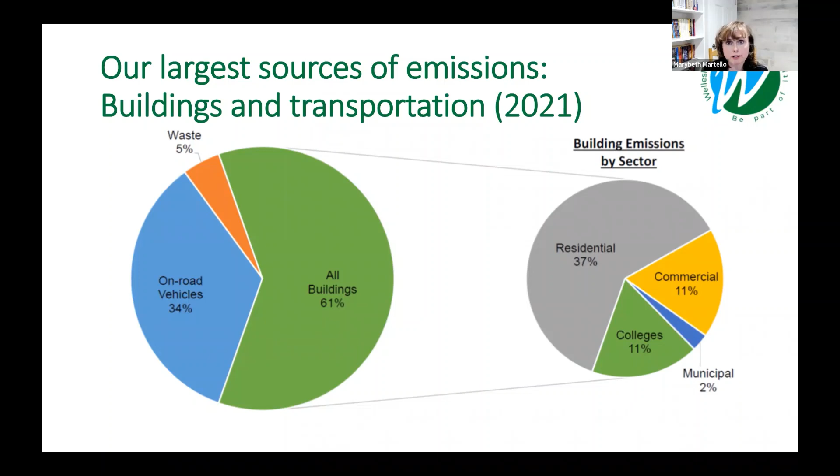And this is a snapshot of our carbon footprint townwide in 2021. And you can see that buildings contribute about 60% of emissions. And if you look inside that contribution from buildings, you can see that the residential sector is contributing about 37% of that. It's 37% of that 61. And then we have about even emissions contributing from the colleges and commercial sector and about 2% from the municipal buildings.

This slide shows metric tons of carbon dioxide equivalent according to energy source. And you can see that in our buildings, which are represented by the 3 bars on the left of the graph, natural gas is the biggest driver of emissions, followed by fuel oil and electricity. We need to get all of these bars to zero or to net zero. And electricity is moving in that direction already because we are increasingly bringing on renewable sources like solar, hydro, and wind to power the grid. Natural gas and fuel oil, however, will only reduce as we use less of them.

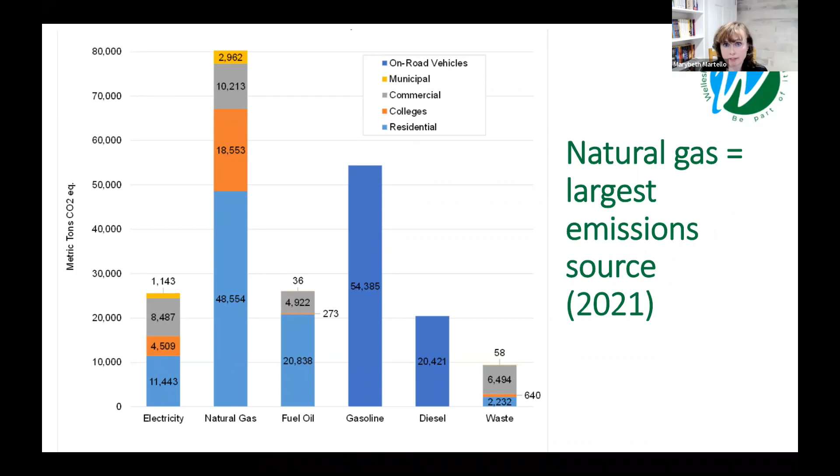So steps to net zero buildings by 2050 involve minimizing our energy use, maximizing energy efficiency, electrifying our mechanical systems and our appliances, and then powering with renewables. These steps underlie Wellesley's Climate Action Plan section on buildings. They underlie our state plans for buildings, and they are inherent, as you will see, in the opt-in code.

Next slide. So now moving to some details about the energy code. I'm going to start with a history of the stretch code. It was developed in 2009 and designed to be about 20 to 35% more efficient than the base code. Wellesley adopted the stretch code in 2011, and the Climate Act in 2021 moved the authority for the stretch code from the Board of Building Regulations and Standards to the Department of Energy Resources.

In 2022, the Department of Energy Resources, or the DOER, provided, I think, 2 straw proposals and allowed comments on those. Wellesley commented, I think, in both rounds, and then DOER issued the energy code update language in September, and that is when Wellesley's Climate Action Committee and Select Board came together in the fall to decide to co-sponsor that opt-in code. Next slide.

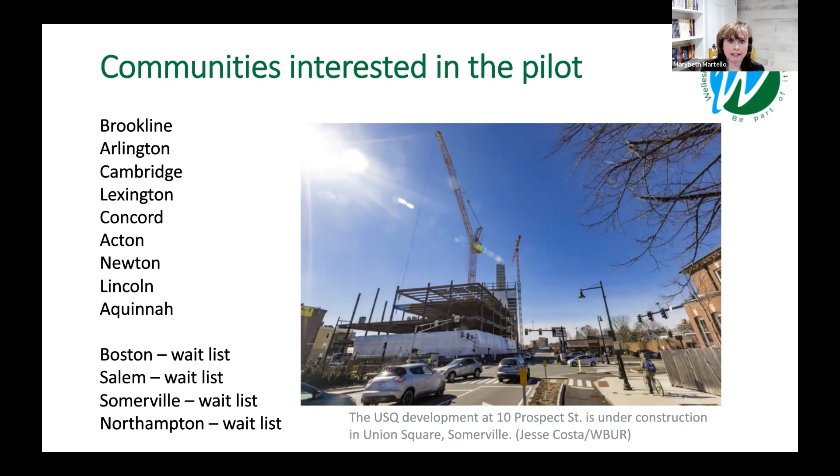So now to talk a little bit about the details of the opt-in code, I'm going to give a bird's eye view of the code, and then Ian is going to delve in more detail into the provisions. So the opt-in code applies only to new construction, not to renovations or additions. It's consistent with emissions reduction goals for the state and the town. And some of the key requirements in the opt-in have to do with electric pre-wiring, solar, passive house, and an earlier start date for the HERS 42 energy efficiency requirement. Next slide.

These are slides that Janet Mosley prepared, and she's the sustainability analyst in town. And this slide shows residential low-rise buildings. And it's comparing stretch and opt-in code for minimum energy efficiency, for electrification, and for renewable generation. So if you look along the left-hand column, you see that there's two types of dwelling units addressed in this chart: dwelling units less than 4,000 square feet, and dwelling units greater than 4,000 square feet.

The white rows reflect all electric buildings, and the light blue rows reflect mixed fuel buildings. Mixed fuel buildings are those that include some form of combustion. And you can see that the stretch and the opt-in code are the same for the all-electric scenarios. The green writing in the light blue rows reflects where the opt-in code differs from the stretch code. So let's look at dwellings up to 4,000 square feet in size.

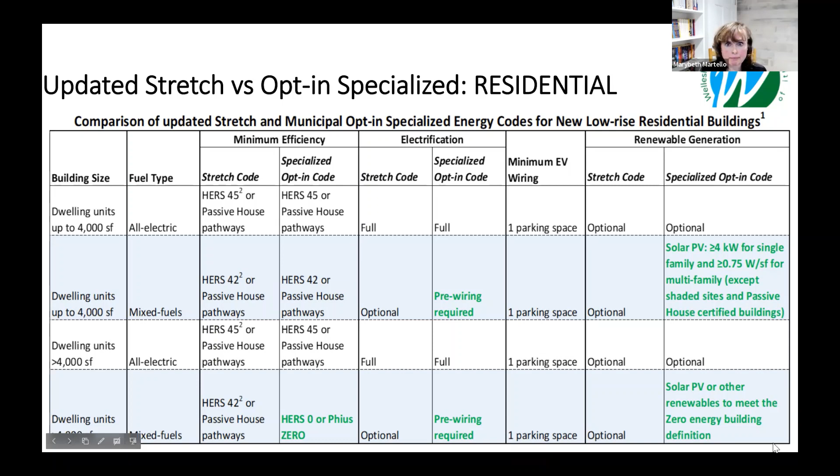So this is a picture of new low-rise residential construction in Wellesley. I want to thank Janet again for this chart. And you can see that the total height of each bar reflects the number of new low-rise residential buildings in the given year. The orange part shows dwellings greater than 4,000 square feet, and the blue is under 4,000 square feet. And you can also see that between 2018 and 2020, about 55 to 59% of these buildings were greater than 4,000 square feet, and that's conditioned space. Next slide, please.

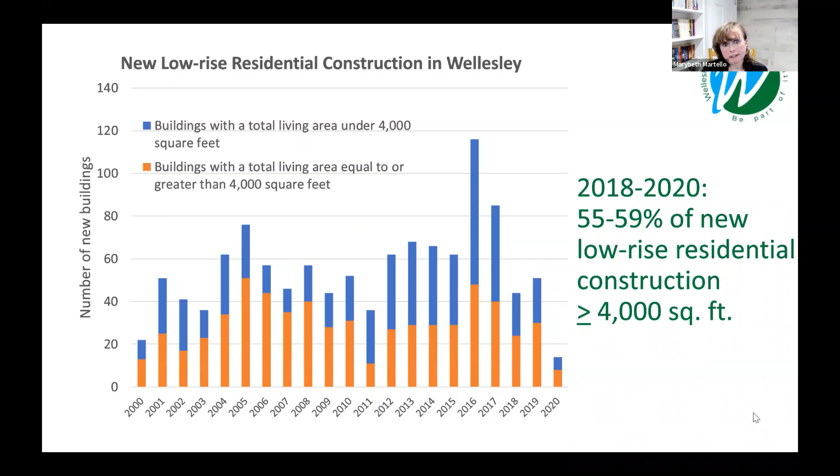We don't have a lot of time to get into incentives. The Climate Action Committee and other groups around town are working. We've been holding webinars about incentives throughout the year, and we'll continue to do so. But I just want to highlight that for the kind of provisions that are set out in the opt-in code and in the stretch code, there are an increasing number of resources to help support weatherization, electrification, energy efficiency, and solar. Also, something that we're going to be talking about as we work through our speakers tonight is that all electric homes are generally cheaper to build, and these high performance buildings are cheaper to operate. Next slide.

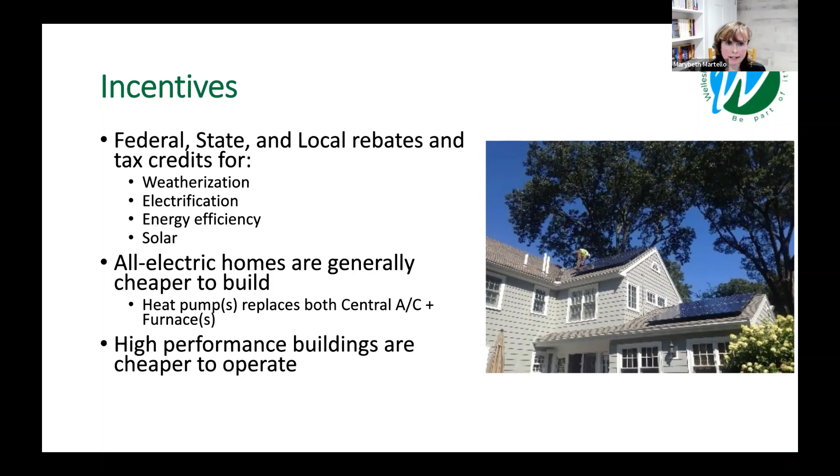So why adopt the opt-in code? We're going to learn more to support these claims as we work through other presentations tonight, but they're definitely necessary for meeting our greenhouse gas emissions goals. They help us to stop digging that fossil fuel hole. The easiest place to stop using fossil fuel is in our new construction, so much easier than retrofitting. So we need to take that low-hanging fruit. And it helps us to avoid costly future retrofits, as we'll eventually need to be all electric.

And especially when we're talking about things like passive house and all electric, encouraging those means that we're encouraging healthier, more comfortable indoor environments, and especially in the case of passive house, more resilient buildings. Next slide. And so now I'd like to turn it over to Ian. Really grateful to have Ian tonight. Thank you.

Thank you, Mary Beth, and thank you everyone for taking your time to learn about this topic. I'm Ian Finlayson with the Department of Energy Resources. And tonight I'm just going to give you a high-level overview of the specialized or opt-in specialized energy code. And then if there's questions, we can get into more detail later as folks want. So next slide, please. So I'm going to start with the residential low-rise sector, then multifamily, and then we'll get to commercial after that. So next slide.

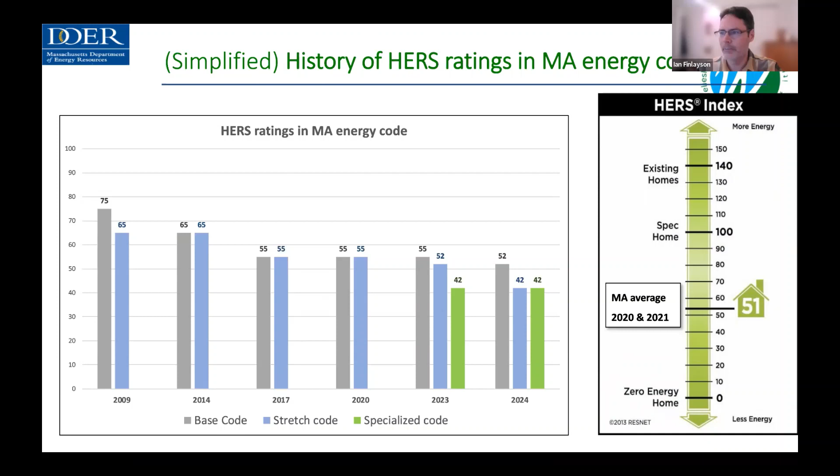So now to understand the difference between the stretch code, which Wellesley is currently on, and then the specialized code, if you choose to adopt it. I'm using that same color scheme where the specialized code is in green and the stretch code is in blue. And the point here is that the specialized code isn't actually affecting every building. And where it is adding additional requirements above and beyond the stretch code, we're trying to keep them fairly straightforward and simple, recognizing that this is going to be a conversation in 300 or so towns and cities. So there are not a lot of nuanced energy efficiency changes for you to understand, although there's plenty of detailed changes in the stretch code itself for folks that are interested.

But the main difference between the stretch code and the specialized code is that the stretch code mandate, which dates back to 2008, is about energy efficiency. And the specialized code is really about decarbonization. And that comes from the legislation that established these two codes. So the 2021 Climate Act is what led to the opt-in specialized code being created.

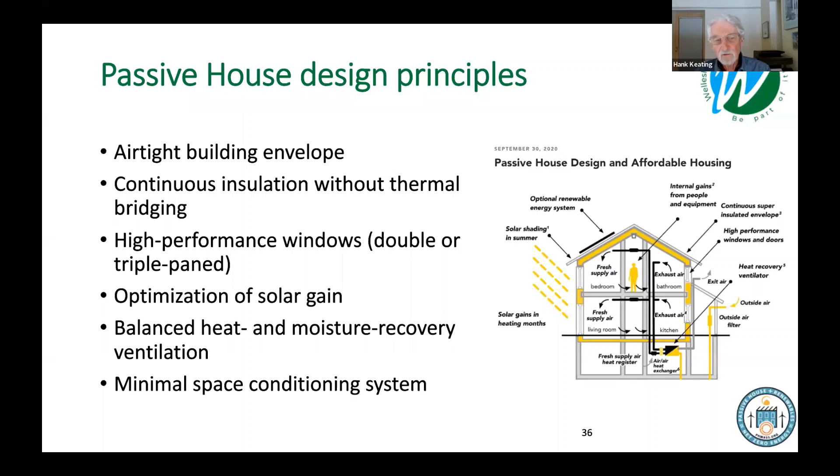So what we find out is that works perfectly well because smaller units concentrate the internal heat gains from buildings. And obviously, when you do a multifamily building, if you have an apartment, it typically has one exterior wall. That's 1 out of 6 surfaces that the unit has that's exposed to heat loss. So when you combine those things, the multifamily buildings are dominated by internal heat gains, and we do not need to worry about optimizing for solar gain. Next slide, please.

So when we do this, what are the benefits? The first benefit actually is reduced greenhouse gas emissions and reduced heating and cooling costs. Then I would go to comfort, increased comfort. When we talk about the air changes per hour, the infiltration is draftiness. And we all know in New England that we've all been in many, many houses where it's drafty.

And it's drafty and uncomfortable, and we have our favorite single glazed, double hung windows where we've got infiltration and we've got radiant cooling off the glass. All of this is what makes these buildings uncomfortable. All those problems are solved with Passive House.

In doing that, because we're introducing 24/7 heat recovery ventilation, the indoor air quality in a Passive House, even though it's sealed up very tightly, is much better than in a house that doesn't have ventilation. One of the ways I like to look at that is to say, a lot of people, builders especially, will say, well, boy, if you seal it up like that, that's going to cause problems.

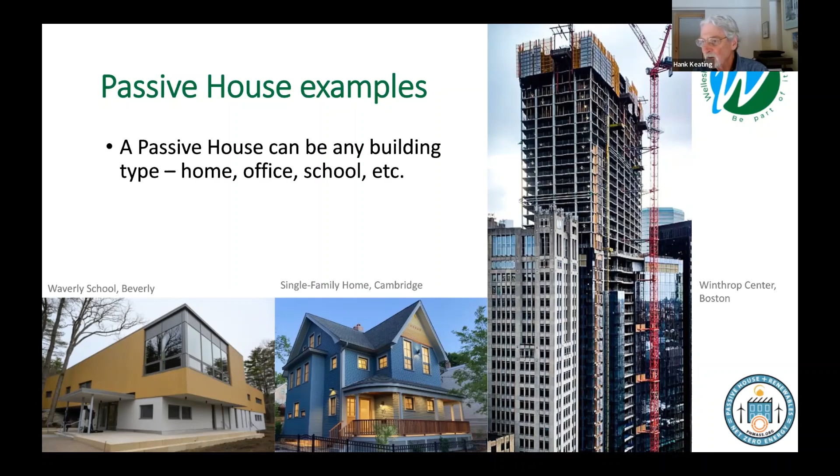This is just to make the point, because we have so many examples of Passive House housing. Passive House is for all buildings, as Ian was referring to. We've got schools, single-family homes, and the largest Passive House office building in the world right now is going up in Winthrop Square in Boston. So it covers all the building types. Next slide, please.

So this was obviously the question that we got 5 years ago when we really started introducing Passive House and hoping to get it as a requirement in codes, and we finally are getting there. The questions were, how much more does it cost? And what we did is we worked with Mass CEC to come up with the Passive House Design Challenge, which offered affordable housing developers money to enter this and convert a design they had to Passive House, and then track the cost increases very carefully.

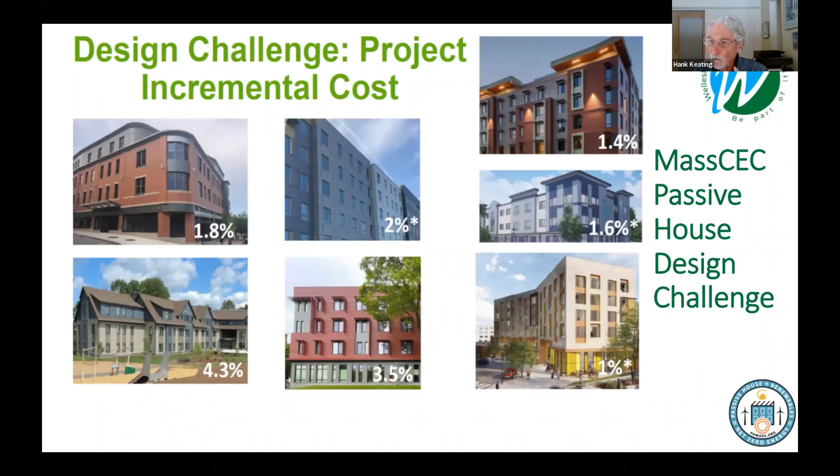And this is the result. So the goal was to keep it under 3%. And you can see with the exception of one here, two, they were essentially under 3%. I draw your attention to the one that's 4.3%. Look at the complexity of the roof lines and the dormers. That's one of the reasons that it costs more. Passive House is best suited to more simplified buildings. Next slide, please.

So the incremental cost findings from the Passive House Challenge were that the average was 2%. Now, I would stress that this is designs done in 2018 with projects being completed over the last 3 years. We've come a long way, and we will continue to come a long way in pricing. So we say that with the right design team, going down to best practices, if you have the experience and the training for your design and construction team, and you simplify the massing of the buildings, or let's say don't get too complicated, you can keep the cost to a 0 increase.

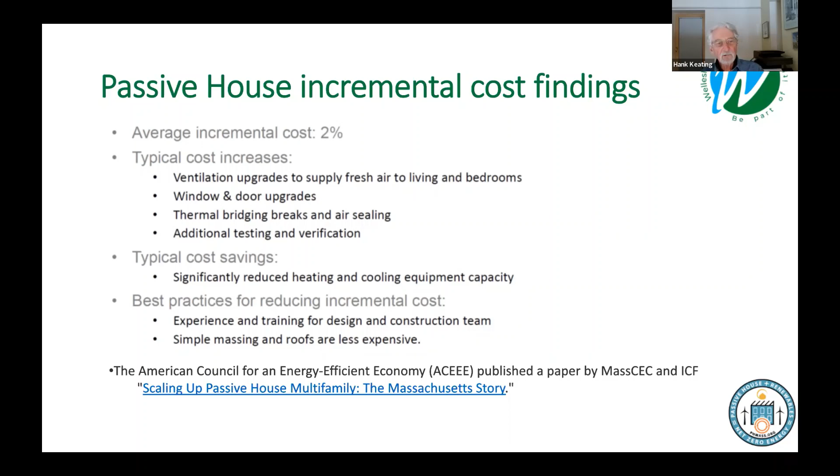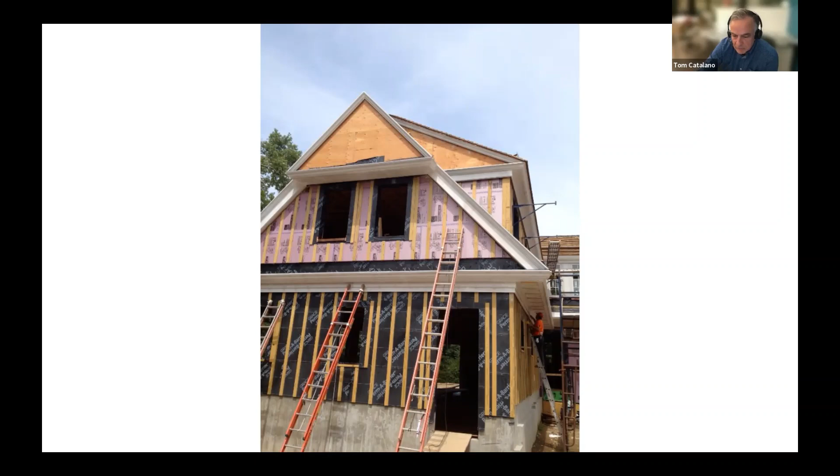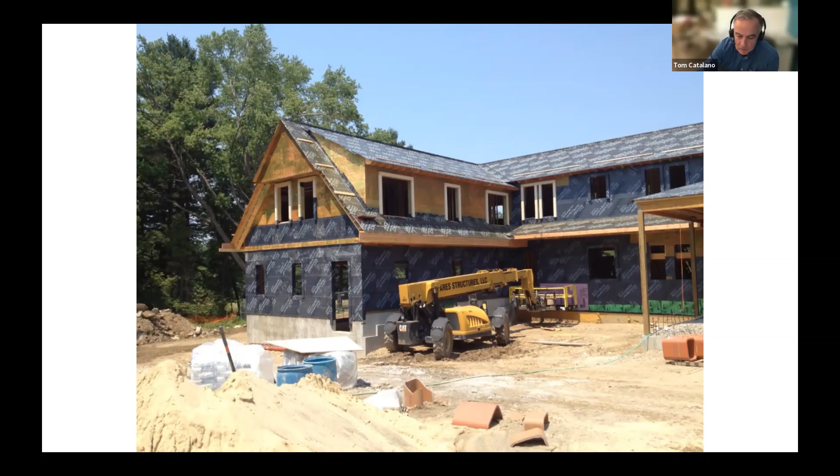And these are just some of the things before the building wrap and before the exterior continuous insulation goes in. You can see that special care has to be taken to extend all of the jambs at the rough openings to deal with the continuous insulation, and have to pay very careful attention to the way each of the window units are flashed. And this application was a continuous layer of uncured rubber membrane self-adhered on the sheathing before the rain screen and continuous insulation went on. And that's just another shot of it after the board goes on.

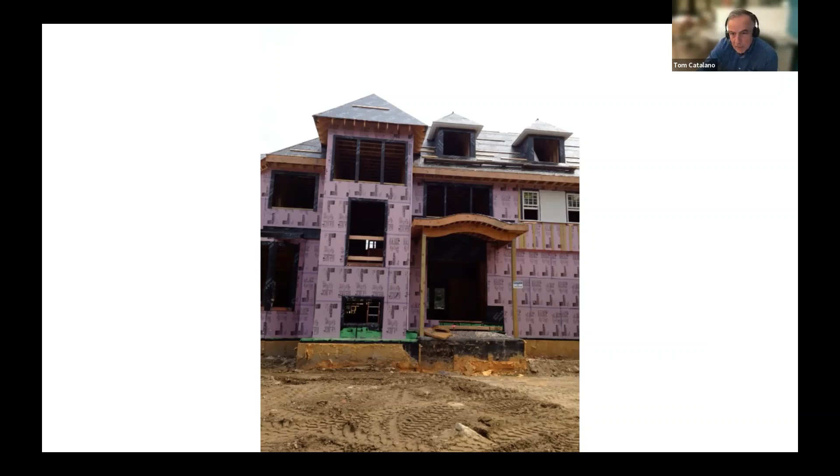But we've been doing both earth coupled and air source heat pumps for a while. I think Wellesley is blessed. I know you have a municipal light plant, but you also have a good part of the town served by 3-phase power, which, especially on projects that are over 4,000 square feet, makes it very easy to have a super efficient air source VRF system. And a VRF system is what the essence of a mini split system is. But when we do the VRF system, rather than having the wall mounted units where you see the machine exposed in the space, it's the same machine, but it's built into a plenum and it's ducted.

So one of the things you get out of the VRF system, which is what the mini split is, is the ability to have very small zones, multiple zones, and really improve your building performance by being able to zone for suitable occupancy. It gives the client the ability to really control the spaces based on how they're used.

I know one of the questions that was raised to Mary Beth in the lead up to this was that air source heat pumps or air systems in general tend to deteriorate the indoor environmental quality and make the space dry. That's quite easy to overcome in combination with the energy recovery ventilation system. Most of our systems have the ability to introduce additional moisture, injecting steam into one or more of the zones. So you can actually have the ideal indoor environmental quality. You can maintain 35% relative humidity year round quite easily. And that's something that all homeowners in the market for these projects that are over 4,000 feet in Wellesley would expect to see.

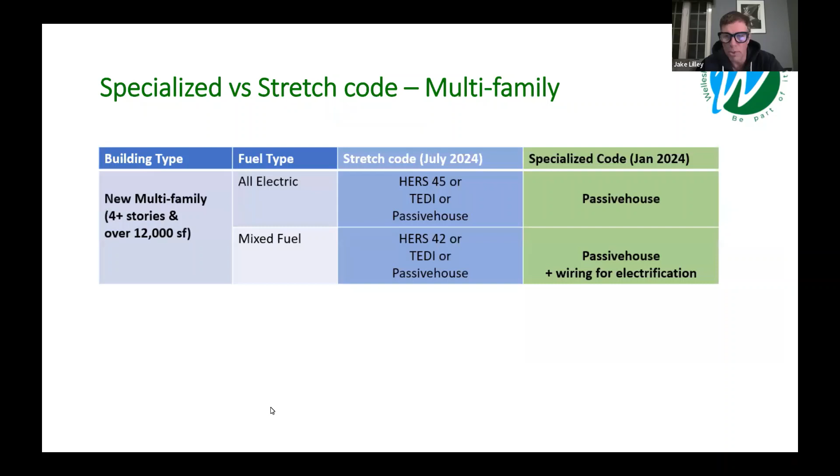So I was having a recent conversation with one of our stretch code consultants, or excuse me, our HERS raters, I should say, and we were just talking about their job and their ability to generate accurate HERS ratings. And, you know, in a nutshell, new construction, additions, things that are easily identifiable, quantitative, those are aspects of the building world which they can perform some strong analytics for.

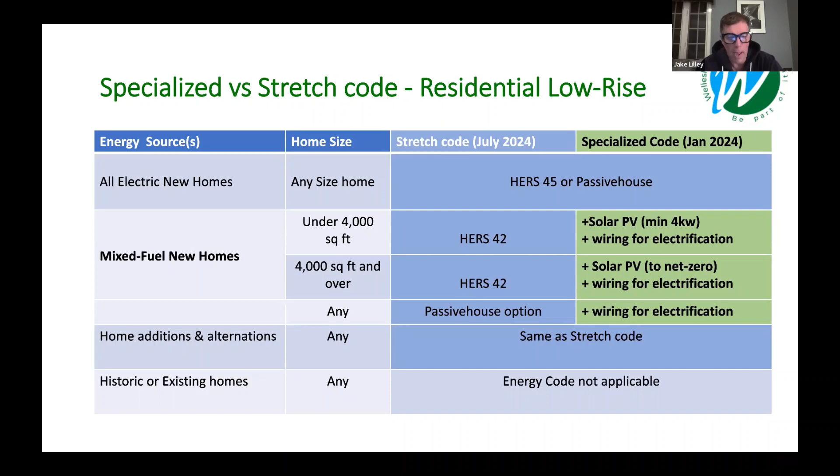But there are many houses, and I'm not sure the DOER has fully vetted this out, and that's really where my question lies, where you will have a house, let's just say it's 6,000 square feet, and a homeowner wants to do an addition onto it and also wants to modify, say, 1,000 feet of that existing house. And so you wind up with a house with 5,000 square feet that's existing, 1,000 square feet that's modified, and some kind of addition. And the addition is highly quantifiable from a HERS rating standpoint, but there's a very big gray area in how the HERS rating is applied to the rest of the house.

And so the question to Ian is, are there technical guidelines coming down the pipe for municipalities that help address how HERS raters are supposed to deal with, let's just call it gray area evaluations? Because I'm not quite sure some of the building inspectors I've talked to in certain towns know how to answer this question. One of them went as far as to say, well, I just don't know how I give somebody a building permit if they're supposed to pass a HERS rating and the HERS rater cannot perform their task due to the variations in the house type. So sorry for the long question. Hopefully there's some benefit from your answer to all of us. Thank you.

Yeah, okay, I'm happy to take that one. Thank you for the question, Jake, and for the background to introduce it. So the first thing I would say is this is a question about the stretch code that's been updated and not about whether you choose the specialized code or not. So I think Jake understands that, but I just want everyone to understand that.

And really what we are seeing in the update to the stretch code, it's the first time that we have anything that triggers an addition or a substantial alteration of an existing house requiring you to look at the whole building to upgrade that whole building. And that's what the HERS rating does. The HERS rating is an assessment of a dwelling unit rather than an assessment of, say, just the addition.